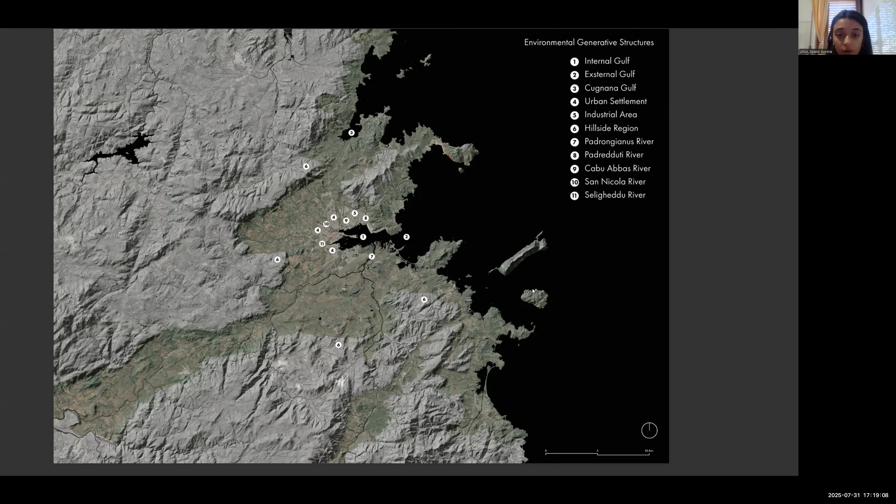We are the UNISS group for the summer school. We wanted to study Olbia by zooming out, to see the natural structure of Olbia and its environmental generative structures. So we tried to study the northern western part that forms a granite hilly heart surrounding the city, and the system of gulfs with the internal and external gulfs, to see how the form of the city of Olbia is based on the natural structure of this territory.

We focused our zone on the internal Gulf, which hosts the delta of the river Padrongiano. This zone comprises the delta of the river Padrongiano and also its fluvial park, which covers 33 hectares of green areas. They represent an important land for the city of Olbia, and it is located on the eastern coast, inserted into the Natura 2000 area.

This is the border of the Natura 2000 project, a network created by the European Union for the protection and conservation of habitats. It includes sites of community interest and special protection areas. It's also inserted inside the Contratto di Fiume, the river contract, which is a voluntary strategic planning tool for sustainable river and basin management.

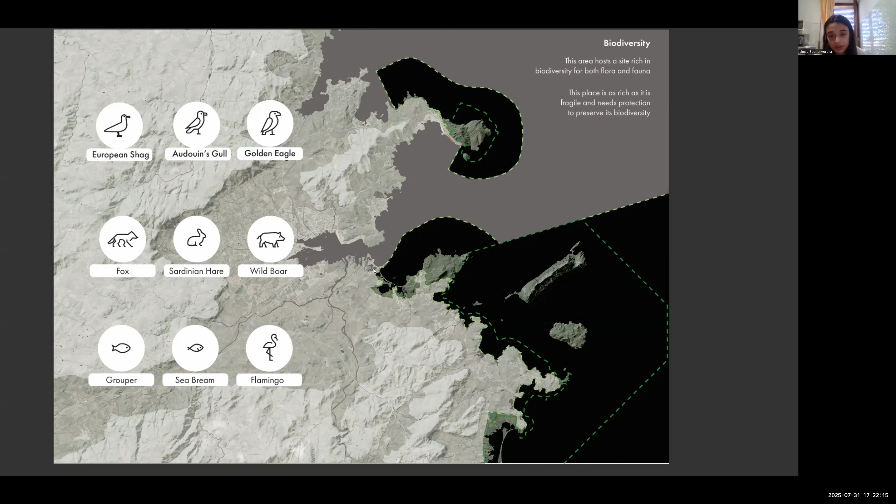It's a thing that in Sardinia is noted. This place is also fragile, especially due to the phenomenon of silting, caused by the connection between the internal and external Gulf. It is caused by the continuous accumulation of alluvial sediments, which lead to the formation of a sandy spit at the entrance of the Gulf, with the consequent risk of lagooning and also the loss of marine biodiversity.

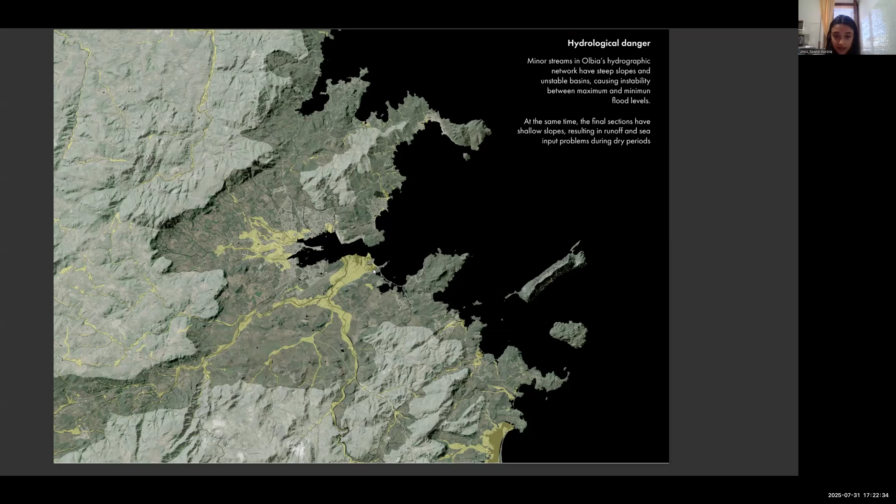The Delta River is highly exposed to hydrological danger. This is the danger and the risk: the hydrological danger represents the possibility of an event occurring at that point, while the risk represents an estimation of the damage an event could create in those areas. The hydrological risk and danger is due to the conformation of the basin and the torrential nature of the river, which is subject to flooding during intense weather events.

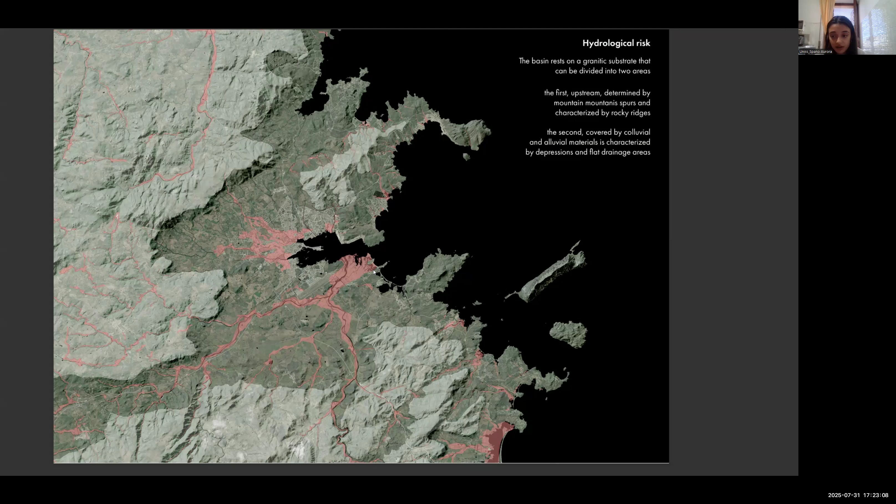We think it's important to remember what happened with Cyclone Cleopatra in November 2013 in Olbia, when the cyclone struck Olbia, causing severe flooding and landslides, and causing a lot of people to lose their houses and their activities. Also, the part of the delta of the river was mainly impacted, with the destruction of the Padrongianus Park, and in all of Olbia there were 13 deaths.

So to mitigate the risk of this event, this hydrological danger and risk, there are several risk mitigation projects that have been launched, such as the construction of a floodway for water drainage to reduce hazard in the urban, and the peri-urban part of the city.

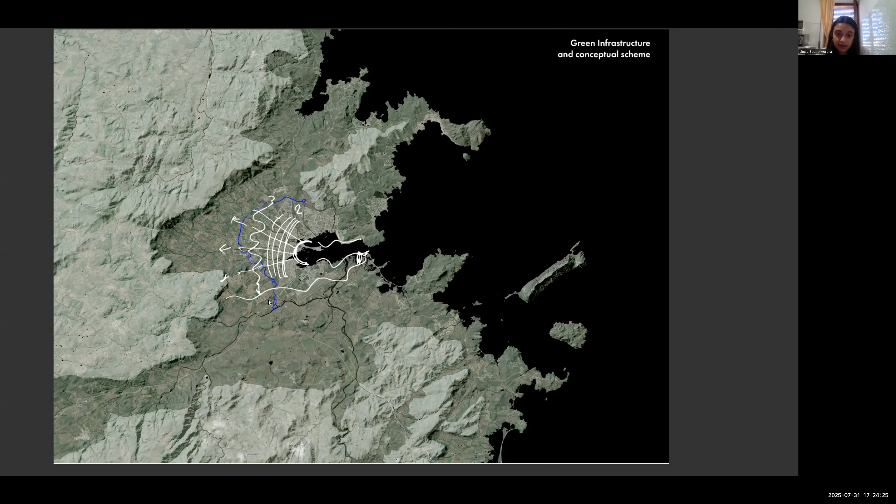The floodway functions mainly as a hydraulical diversion, allowing the flow of a river or stream to be reduced by diverting part of it. So this hydraulical infrastructure collects water from all the minor watercourses that are inside the city of Olbia, and directs it into the Padrongiano River and its delta. This is the point where the floodway connects with the Padrongiano River, but then it continues to direct the water into the delta.

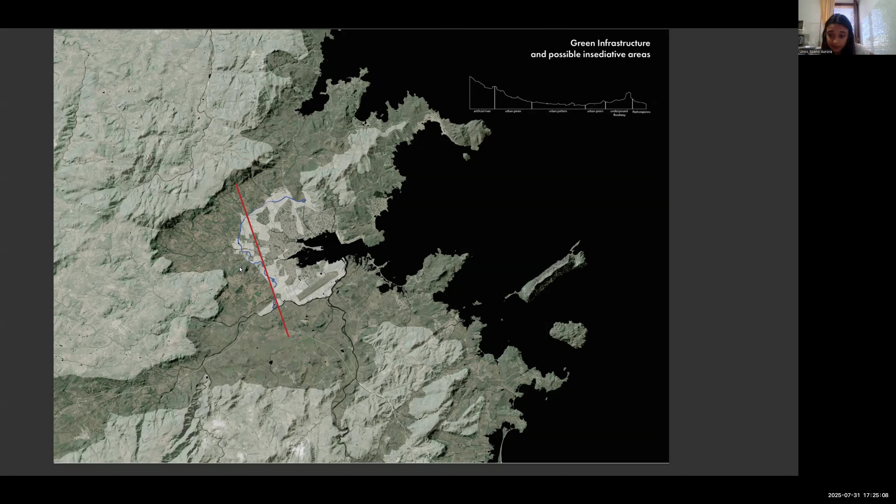The floodway is not just a hydraulical infrastructure, but claims to generate a different peri-urban city. Olbia, unfortunately, is undergoing a suburbanization event. The city is expanding following these main lines, leaving a lot of spaces overlooked, which we highlighted.

These spaces and the expanding of the suburb along this line are making the city less and less pedestrian friendly, and it's just not really viable at this moment.

So our green infrastructure is actually the floodway, but this infrastructure wants to define a border for the city, highlighting all those areas that are overlooked, in order to generate a radial reorganization of the city, especially of the suburbs, creating a sort of ring that will contain the problem of the expansion of the suburb, bringing new awareness and services to that part of Olbia.

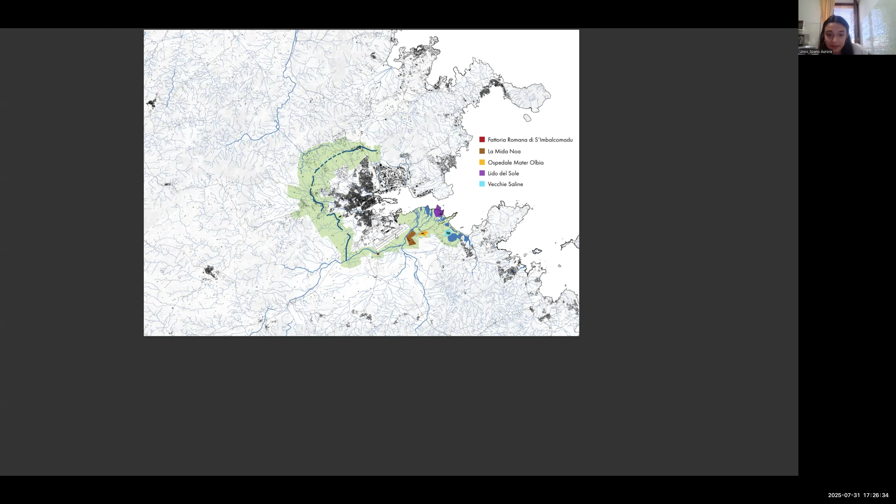Following the path of the green infrastructure that starts in the northern part and arrives in the delta, we encounter, especially in the southern part, in the third zone, a lot of urban elements that are prone to requalification, such as La Mida Noa, a new neighborhood that is expanding, or La Fattoria Romana di S'Imbalconadu, a ruin that is now abandoned but to be requalified.

Yeah, please finish your presentation. Okay, and you can proceed. I was scared. Okay, okay.

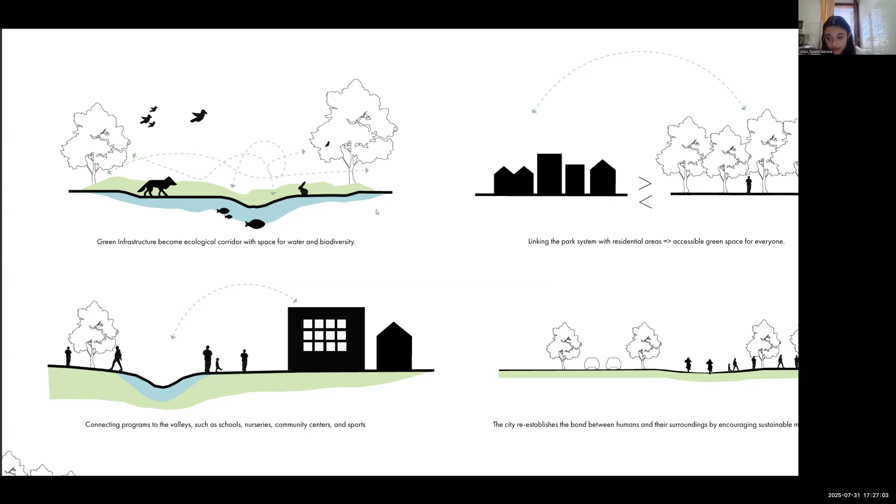So while this overlooked area of the suburb is kind of ignored, we wanted to insert the city into a new ecological corridor due to the green infrastructure. There is basically an artificial river, and we could cross the suburb. So this new river will create new spaces and services for the city, like schools or sports centers, daytime nurseries, and will encourage new sustainable mobility, such as pedestrian streets and cycle paths.

So we just wanted this green infrastructure to not simply be conceived as a defensive structure, but as a new element in the city that will cross and better all parts of the suburb of Olbia, creating, from the northernmost part to the Delta River, a new green city that is pedestrian friendly and more viable, including some requalification of the landscape and some architectural building for the Padrongiano River and park. So that's it, thank you for your attention.

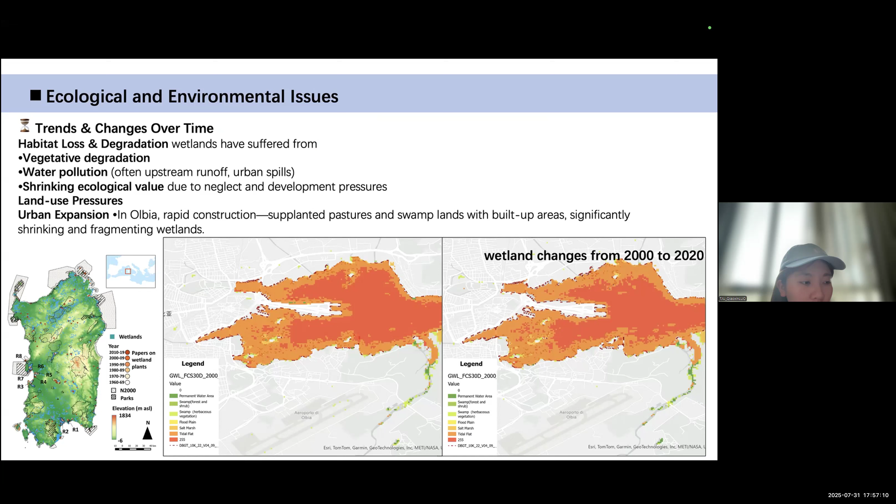Olbia's ecosystems are under threat. Coastal wetlands and river deltas, vital for flood control and biodiversity, suffer from vegetation loss, water pollution, and urban sprawl. Since 2000, unplanned construction has fragmented these habitats, risking ecological collapse.

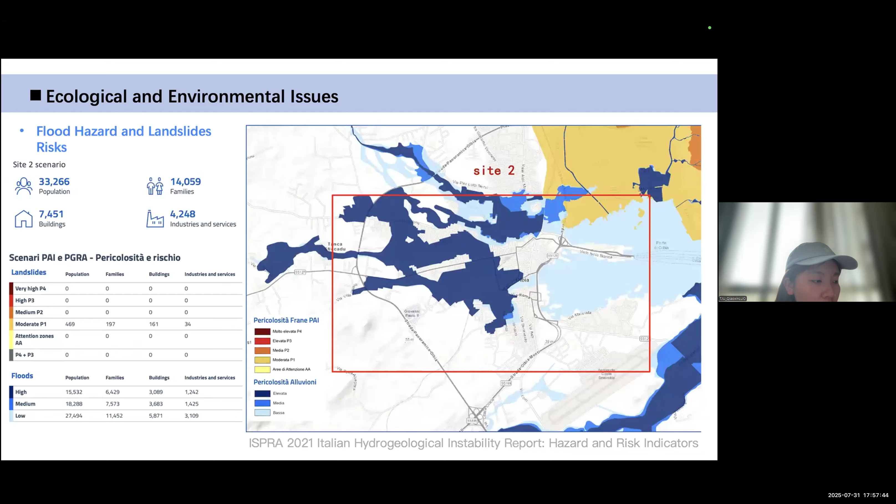Compounding environmental issues, Olbia faces high flood and landslide risks, as highlighted by Italy's 2021 hydrogeological instability report. These hazards disproportionately affect vulnerable communities and tourists alike.

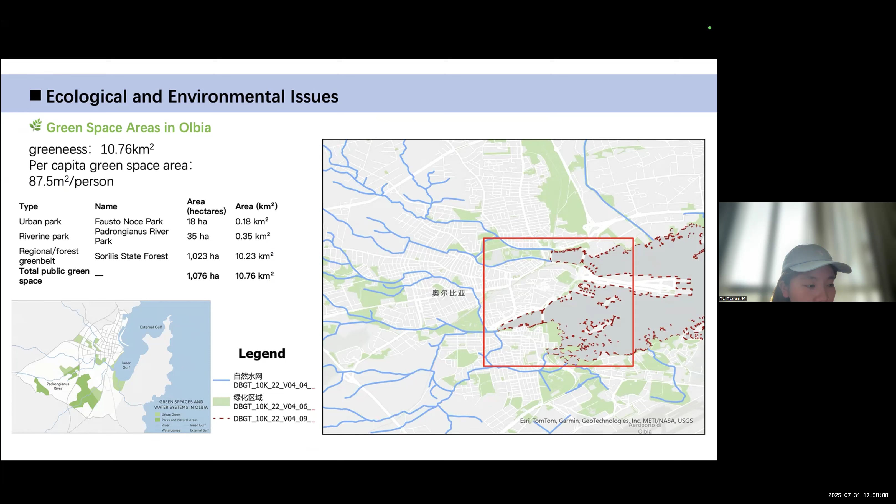Despite these challenges, Olbia has valuable green resources. The city offers about 10.76 square kilometers of public green spaces. These parks provide a strong foundation for our health-oriented design strategies, through which connectivity and accessibility can be improved.

However, public spaces lack integration with transportation. Pedestrian streets in the historical center fail to connect to bus hubs and the seaside, while coastal areas lack continuous walking or cycling paths, limiting accessibility and community interaction.

Also, public transit is inadequate. Only 10% of residents live within 500 meters of a bus stop, forcing reliance on private cars. This not only worsens traffic, but also excludes those without access to vehicles.

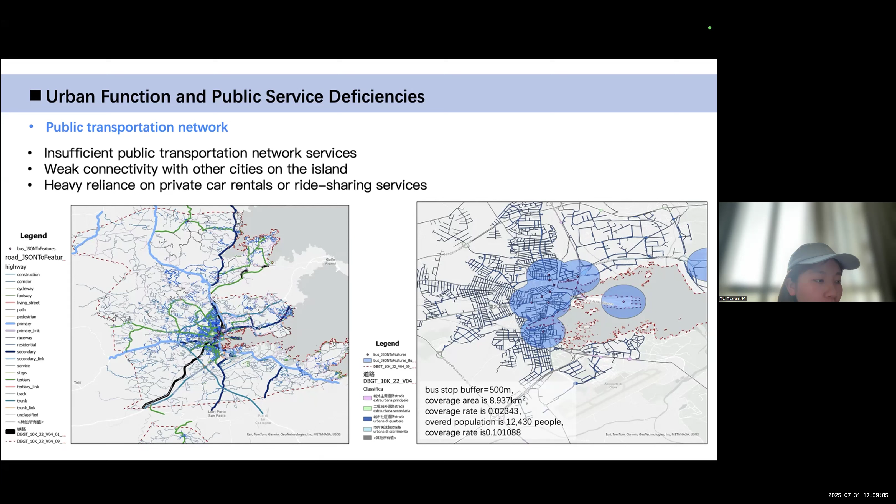The slow traffic network, critical for active lifestyles, is fragmented. Waterfront areas, prime for walking and cycling, remain underdeveloped, missing opportunities to promote healthy behaviors.

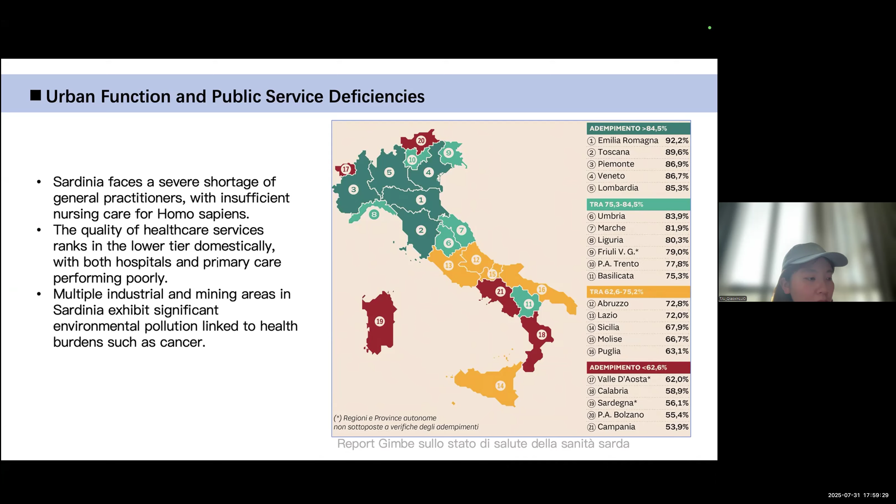Also, healthcare access is a pressing issue. The city faces a shortage of general practitioners, and Olbia's 3 hospitals struggle to serve 102,000 residents. Even with 3 hospitals, accessibility is uneven. While most residents are geographically covered, response times lag during tourist peaks, leaving both locals and visitors vulnerable.

So now let's focus on our core strategy: designing for healthier lifestyles. This framework integrates environmental, social, and physical health to create resilient and inclusive urban spaces. Our approach targets 3 pillars: reduce environmental hazards, promote active behaviors, and ensure equitable access to health resources.

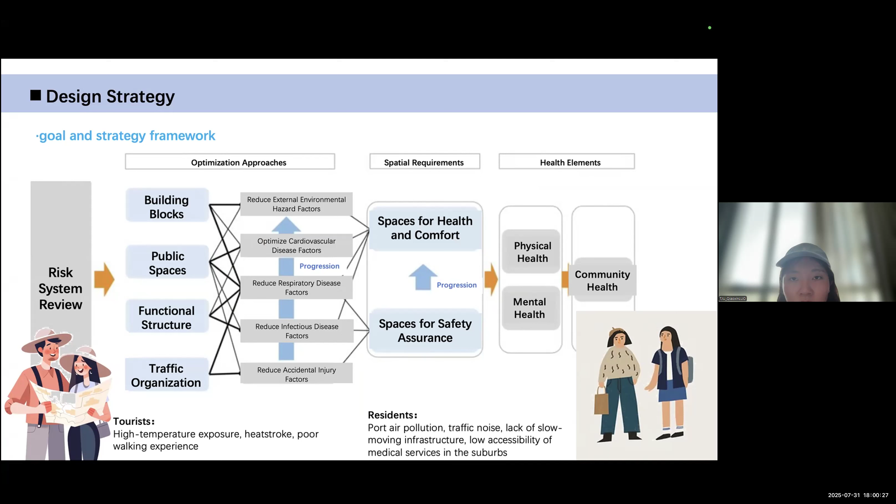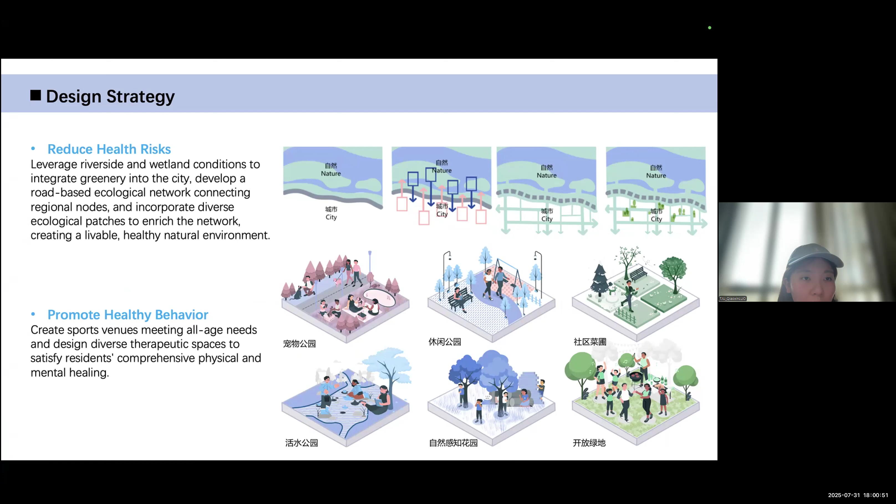We address risks to both residents, like port pollution, and tourists, such as heat stroke. Third, to ensure health resources, we propose a system of multi-level public services organized around walkable neighborhoods to improve access to daily needs and health care. These interventions will create a more sustainable and livable city.

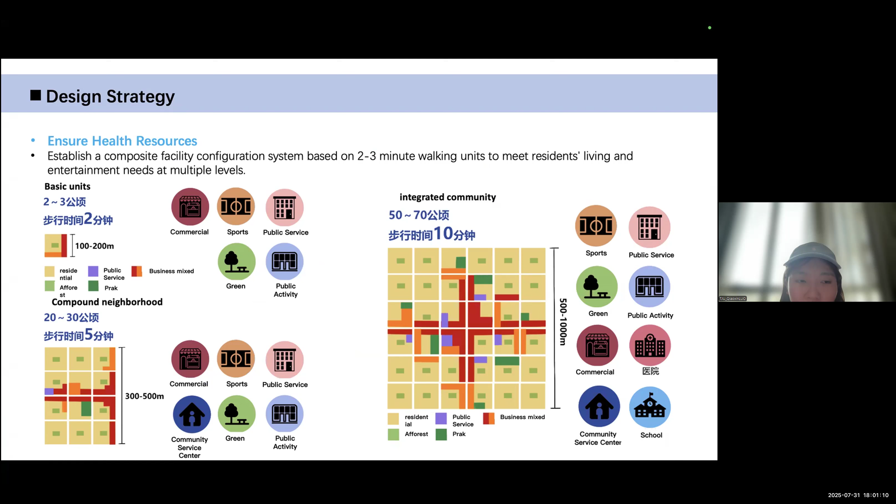Finally, we will construct a coastal green ecological network. This picture shows our strategies to improve health resource access. As we can see with walking times limited to 2, 5, and 10 minutes, residents can have great access to those health resources.

Finally, we will construct a coastal green ecological network, linking key nodes with a pleasant slow-moving system and optimizing transportation to boost regional connectivity. Sustainability remains central, ensuring harmony between urban development and nature.

To conclude, Aurora has the potential to become a model for healthy, sustainable cities. By integrating green infrastructure, inclusive mobility, and equitable services, we can create a place where both residents and visitors thrive. Thank you.

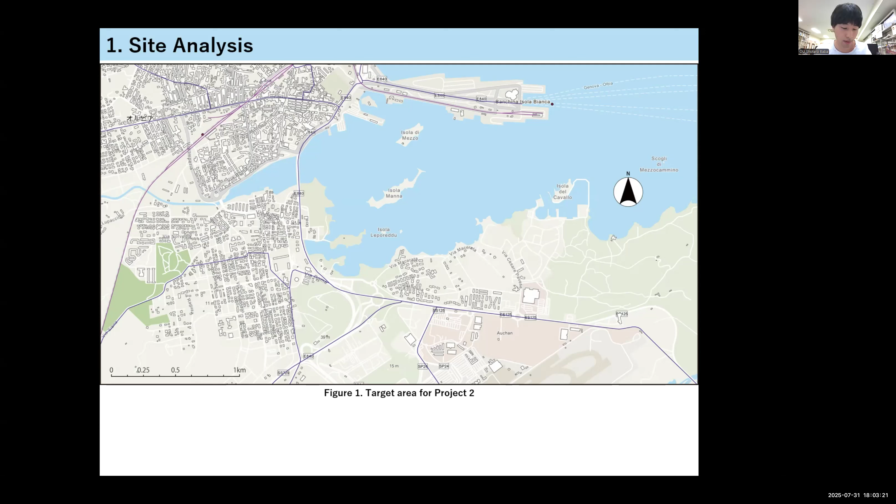Hello, we are students at Oita University. We will be presenting on Project 2.

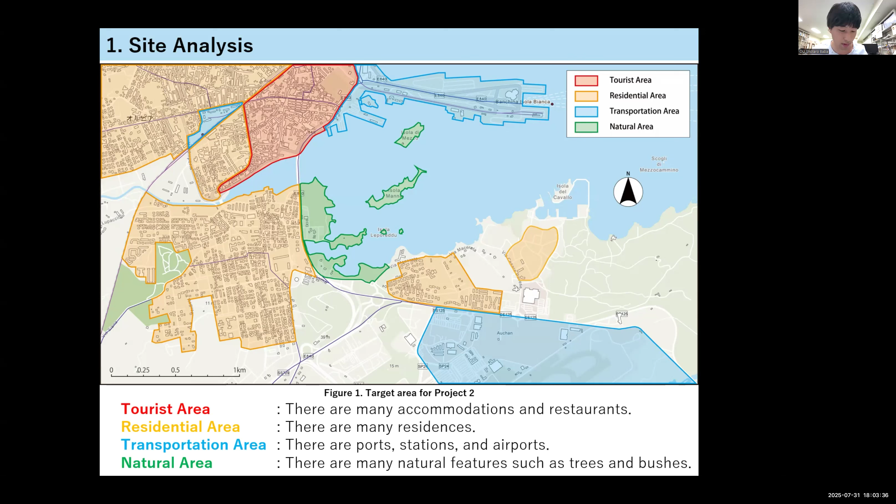The first is the site analysis. Figure 1 shows the target area for Project 2. The target area was divided into 4 areas based on the characteristics of each area.

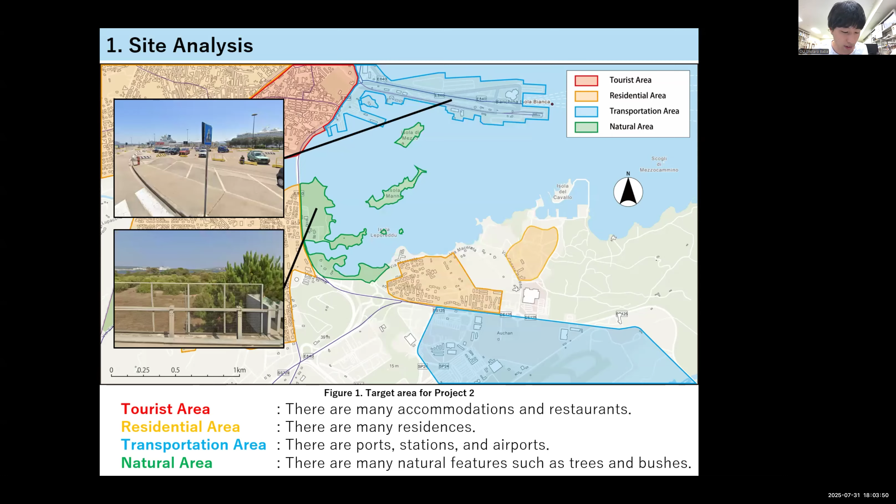We consider the red area to be the main tourist area, the orange area to be the residential area, the blue area to be the transportation area, and the green area to be the natural area.

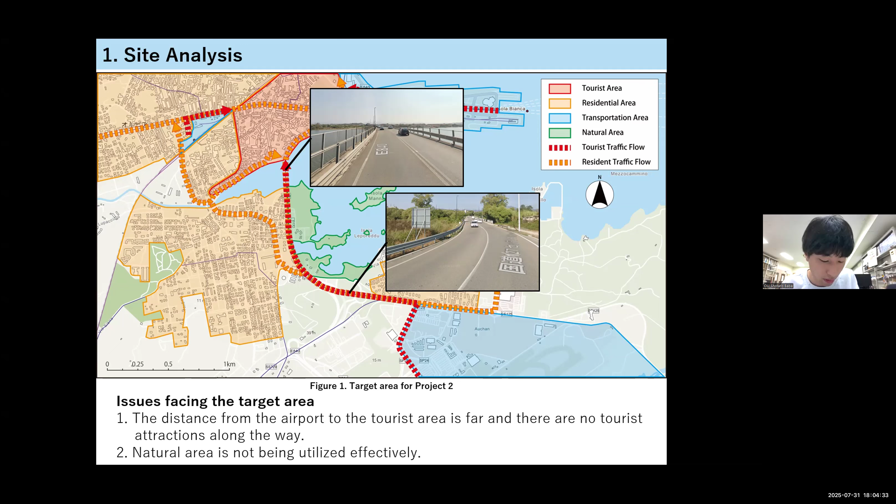The red arrows in the figure indicate tourist traffic flow, while the orange arrows indicate resident traffic flow. There are many roads that are difficult for tourists to walk on, so it is expected that people will often use cars to move between each area.

Based on these findings, we consider four issues facing the target area.

The first is that the distance from the airport to the tourist area is far, and there are no tourist attractions along the way. The second is that the natural area is not being utilized effectively.

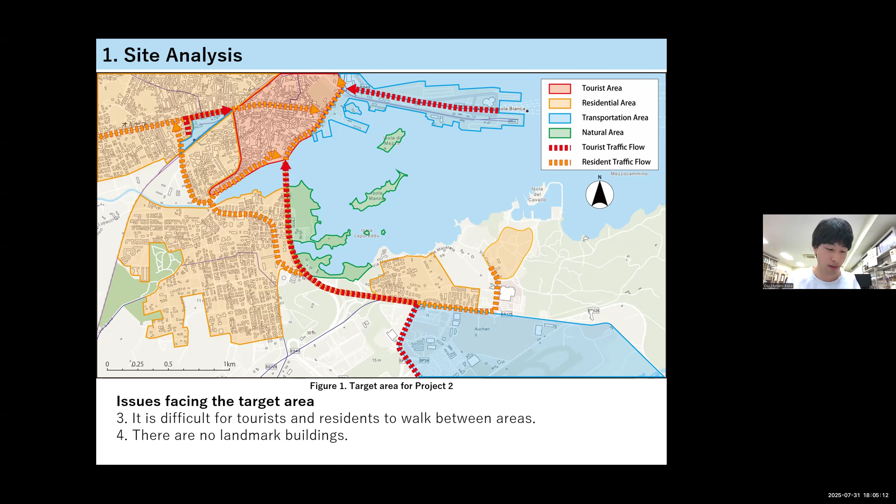The third is that it is difficult for tourists and residents to walk between areas. The last is that there are no landmark buildings.

Based on these considerations, we offer the following suggestions. The title is En. En has two meanings in Japanese.

One is circle. The other is an encounter or relationship between people.

In the building we propose, people will choose what they want to do and will not interfere with each other's choices.

People accept each other's actions, and new connections are formed in the town surrounding the bay.

These are the diagrams of our proposal. The first is the crossing of gazes in different spaces intersected by the change in height.

The second is interaction. New spaces are created by the interaction between tourist and resident.

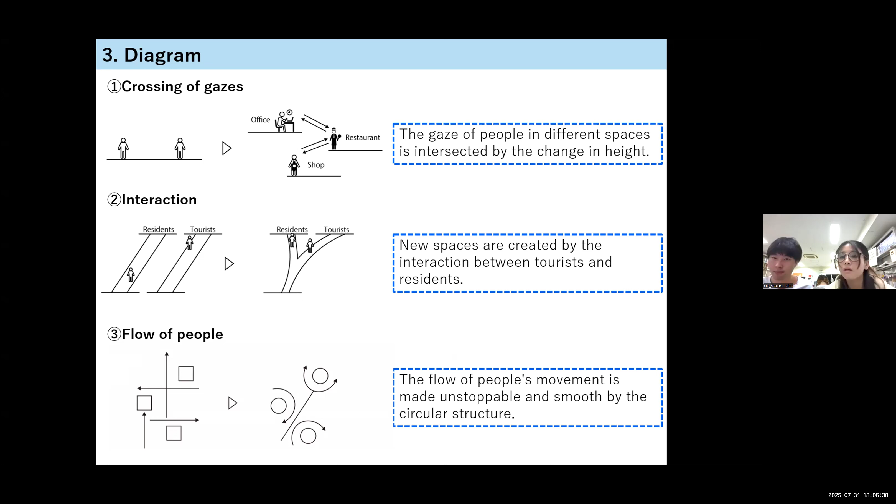The last is the flow of people. The flow of people's movement is made unstoppable and smooth by the circular structures.

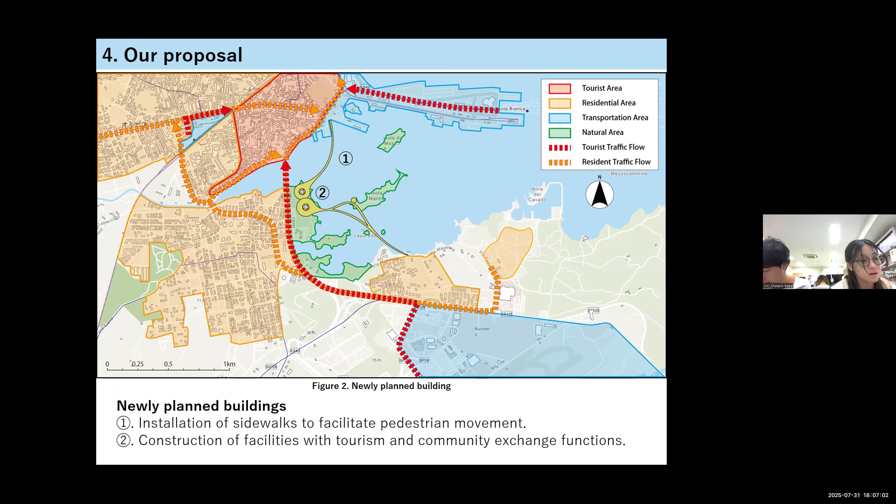The second is the construction of facilities with tourism and community exchange function.

The effect of the newly planned buildings are as follows. Placed...

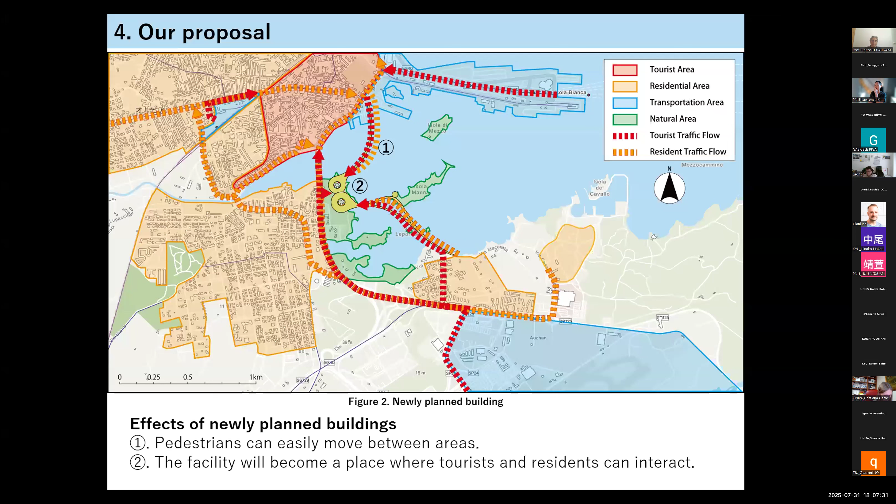In areas by installation of sidewalks, the facility will become a place where tourists and residents can interact.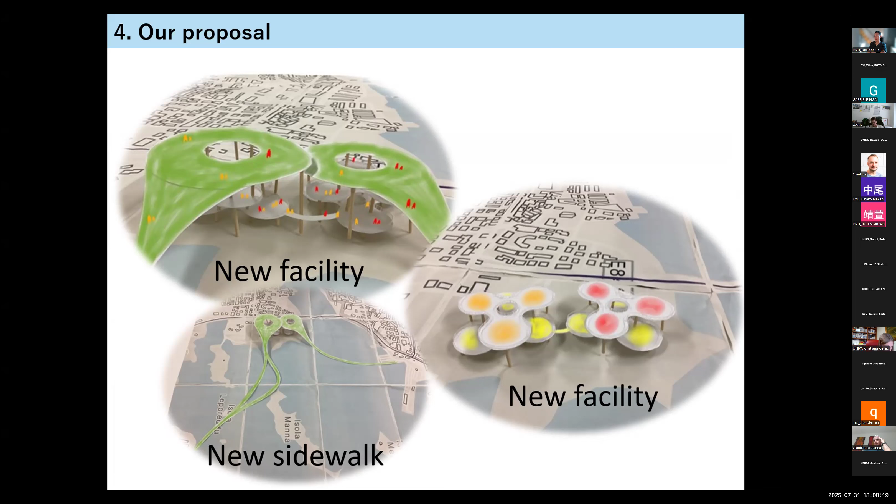Here shows an image of our buildings. As shown in this building's model, each space is at a different height.

Tourists and residents can interact on the lowest floor. In addition, the lowest floor is floated above ground level, so that it will not lose function even when flooded.

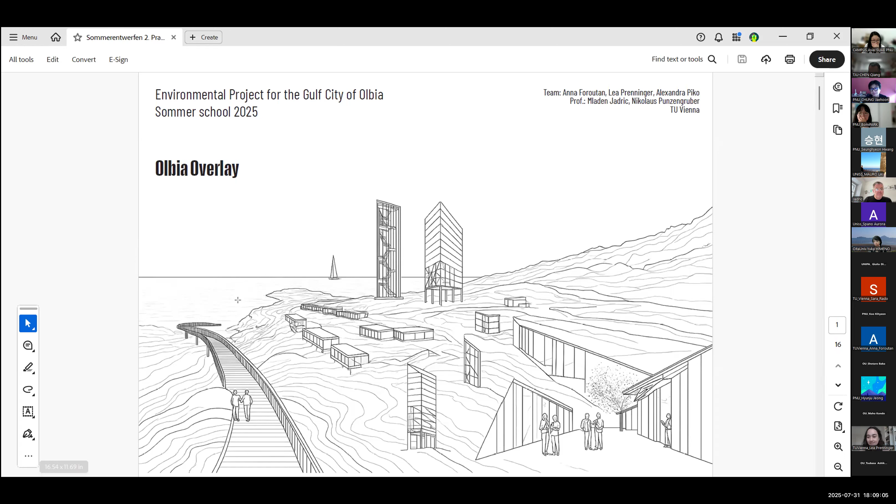Hello again from Vienna. Today we want to present to you our further developments on our concept, Olbia Overlay. Last week, or on Monday, we already presented to you all the urban, cultural, and environmental challenges Olbia is facing.

But we also mentioned its lush nature and the potential that arises through working with these problems.

To summarize, our goal is to enhance the mobility and accessibility of the area and to create a platform for educational and cultural events, but at the same time to preserve Olbia's nature and also the historical sites.

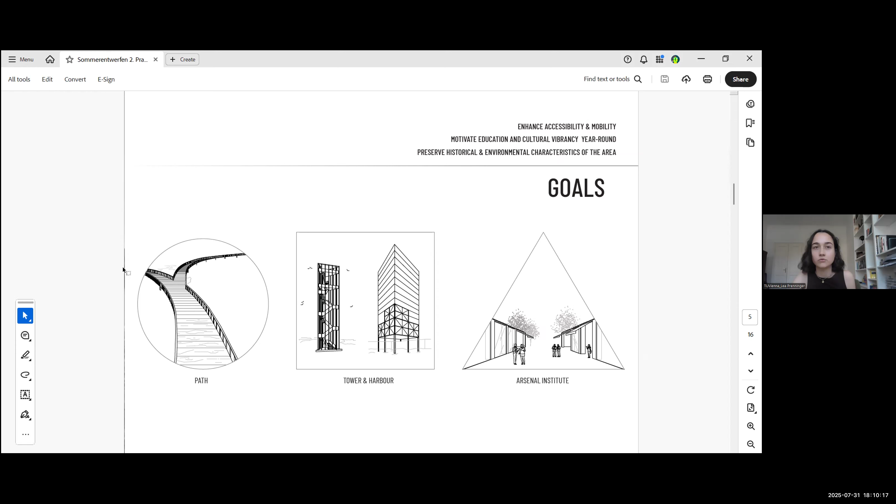Our main interventions are a pathway and a tower overlooking Olbia's nature, and furthermore an inviting harbor region, as well as an institute located in the old arsenal, which is accompanied by a park along the Padrongiano River.

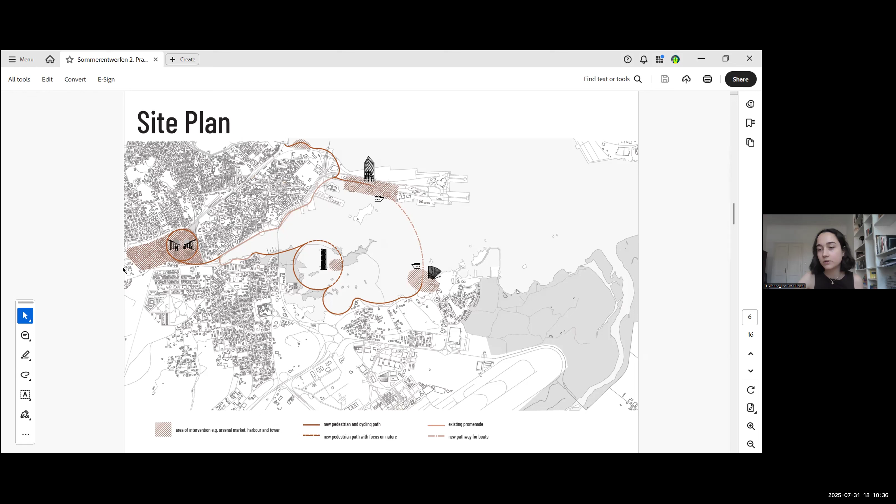Those main interventions are all connected by a pathway, which is now enclosed by a boat route, and which also enables not only mobile people to use our path, but also, for example, elderly people to experience Olbia's nature.

And also the coastline. Regarding the dimensions of our pathway, the total length is about 7 kilometers.

This means it would take about 2 hours when walking really slow, or about 15 minutes by bike. So this is a major improvement, especially for a fast and at the same time safe route along Olbia's coast.

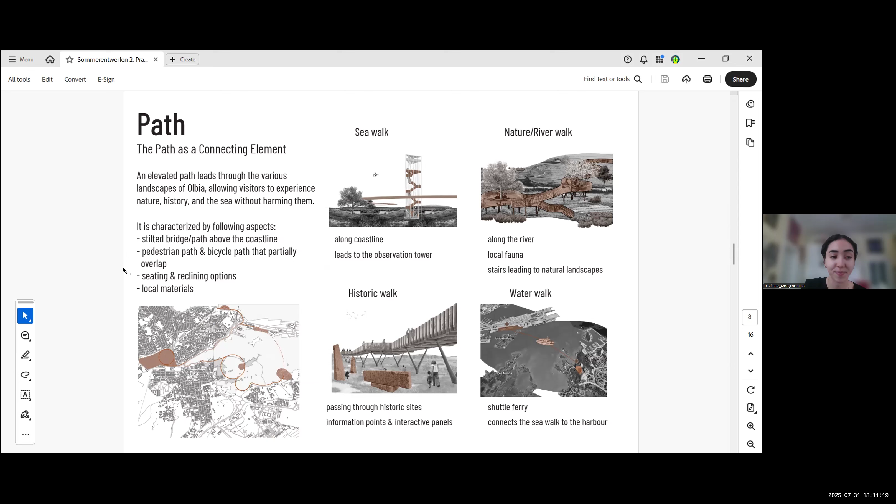In addition to the sea walk, river, and historic walk, we have added a new boat path that adds a fluid connection across the water. This shuttle connection links the amphitheater area directly with the harbor, creating a seamless movement between land and sea.

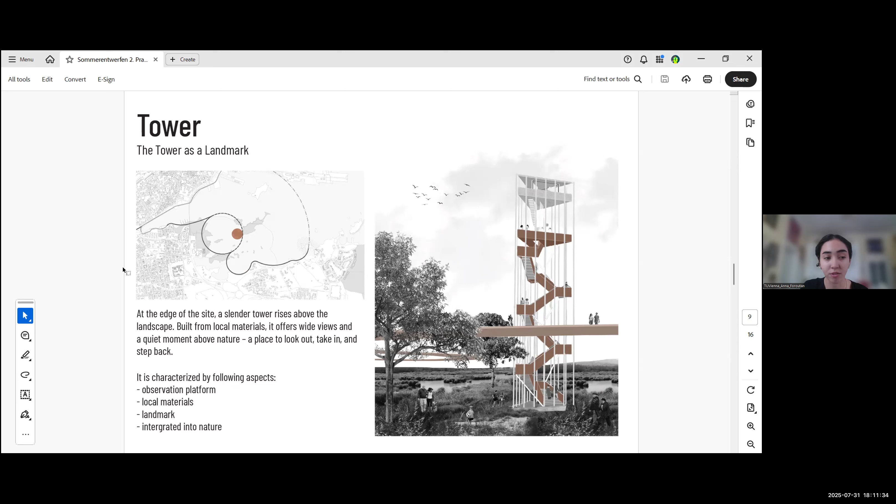An observation tower becomes a visible point for orientation. It's slender, elevated, and built from local materials. It's open, and the design ensures that it does not act as a barrier for birds or animals, but rather coexists within the landscape.

The former arsenal is being repurposed and expanded into a contemporary institute for education and research. This transformation is complemented by surrounding residential and student housing, creating a dynamic, lived-in academic environment.

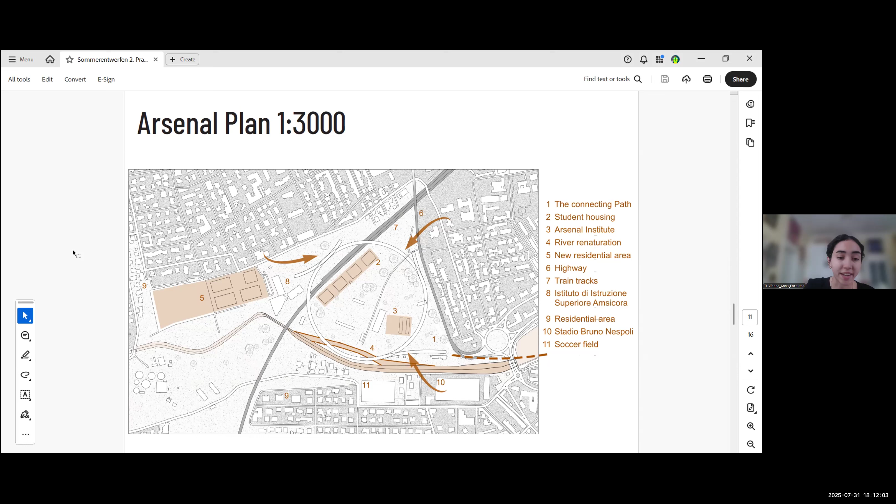The adjacent river is renaturalized and split into two arms, forming an island that becomes a new focal point for ecology and recreation.

A public park with an arboretum enriches the space further, offering a living classroom and quiet retreat for students and locals alike.

Located directly at the ferry terminal in Olbia, the port houses serve as the first point of contact for arriving visitors. The buildings combine key functions such as a hotel, maritime center, tourist information, rooftop cafe, and restaurant. With their mixed-use program and strong connection to the waterfront, they offer orientation services in a welcoming atmosphere. Key features include a viewing deck, integration with the shoreline, and multifunctional use.

Gallura granite, a coarse-grained and weather-resistant stone traditionally used in Olbia, serves as the base material for the landmark tower, grounding it both structurally and contextually. Above, the structure transitions into lighter materials, primarily wood, chosen for their durability and strong local identity.

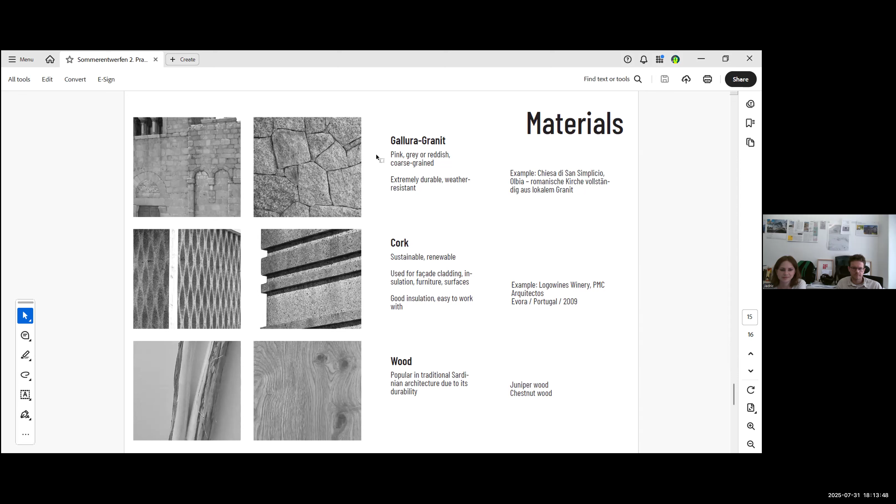Yeah. Thank you. Thank you, Tobin.

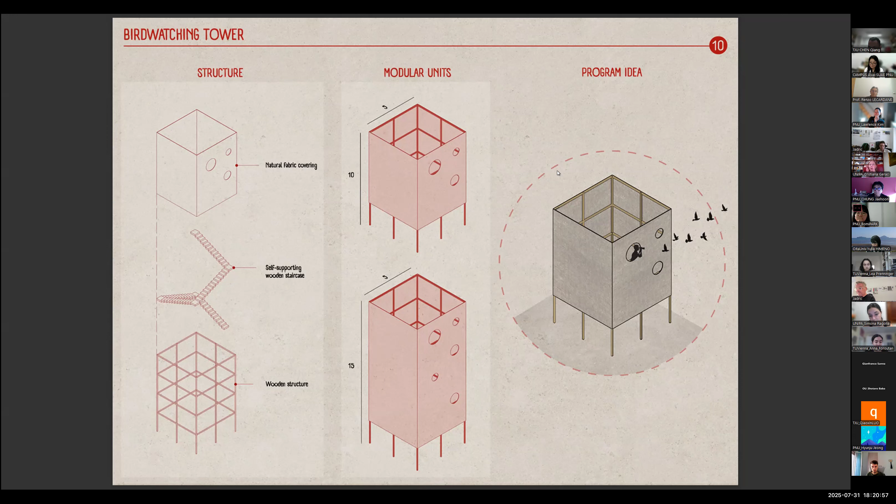Our design proposal is articulated through three main interventions conceived to integrate into the environmental context and generate a new relationship between the natural, human, and animal elements. For the first, we have the bird watching tower, designed as a flexible module adapted to various geographic and visual conditions, made of natural wood and steel, providing shelter and observation space for both people and wildlife.

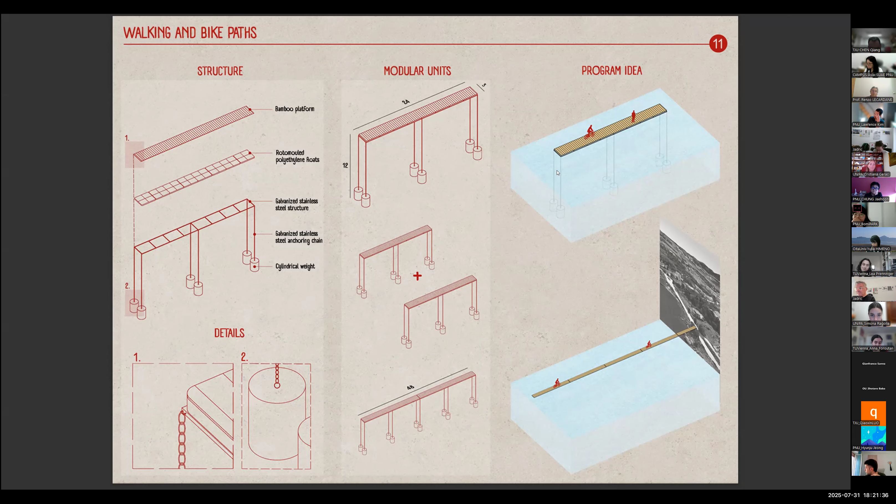Some versions include interactive micro-habitats to support bird biodiversity. For the second, we have the walking and bike paths, light, reversible, and resilient infrastructures. The supporting structure is made of stainless steel with a bamboo tread walking surface, a modular float anchored safely with cylindrical weights adaptable to the city morphology. These paths are designed to immerse into the landscape following the waterline without interrupting it.

For the third, we have the floating dock, designed to ease pressure on the central port by offering a new docking area for small tourist or cultural vessels. Here modularity is key. Each dock can be disassembled, adjusted, or relocated, and the goal is not to build forever, but to inhabit temporarily with ecological intelligence. At that end, we summarize our work in a conceptual map of action.

Okay, can I finish? And we...

We decided on three points: inclusion and equity, promoting access to the place, the resources, and the opportunities for all; coastal resilience, strengthening the territory's ability to respond to extreme events; ecosystem reinforcement, protecting and restoring biodiversity, creating favorable habitats. And we also estimated the potential employment impact of our proposal.

The floating dock, for example, needs a mooring assistant, a surveillance role, docking management. This employment grows not as an end in itself, but as a virtuous outcome of a project rooted in the care of the territory, synergy with nature, and respect for all forms of life.

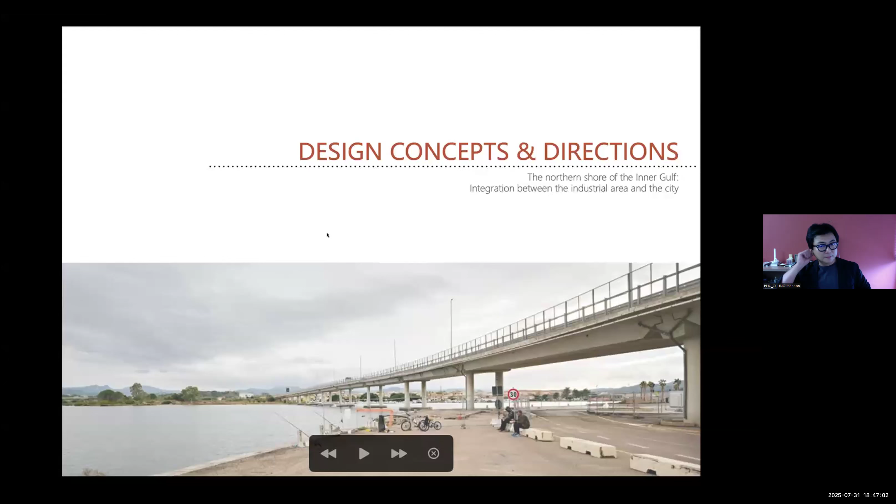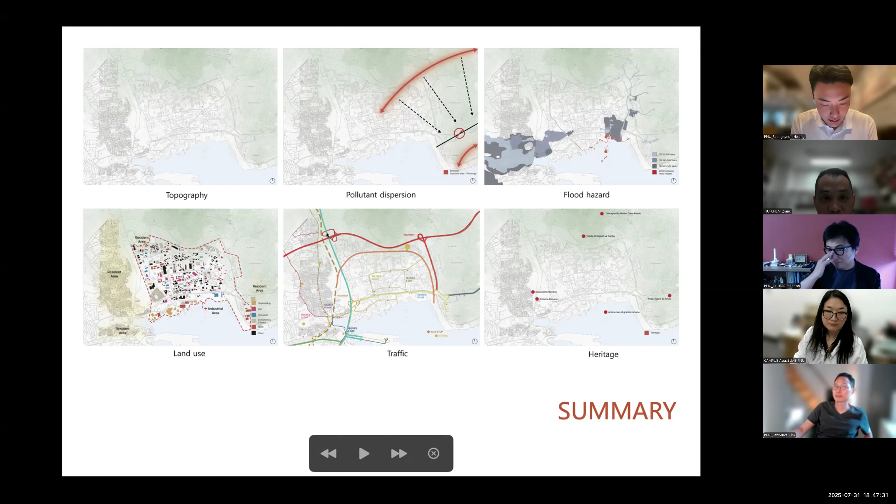Hello, we are Changwon Yu, Hyunju, and Seunggu Hwang from Pusan National University. Today, we would like to present how we plan to develop Project 1 based on our previous research. To begin with a summary of our previous presentation, through topographic and climatic analysis, we identified 4 key issues.

First, the potential spread of pollutants by northwesterly winds. Second, generally low flood risk, but certain areas lacking sufficient drainage. Third, a disorganized layout of industrial facilities. And fourth, traffic congestion and urban disconnection at key intersections. Among these, we focused on the waterway that traverses the city.

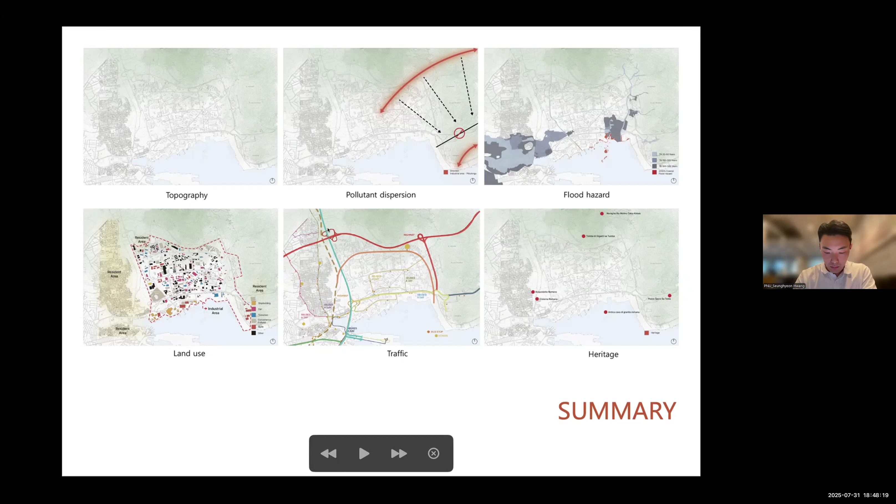We proposed that this water channel is not merely a drainage facility, but a potential urban public spine that connects industry, housing, and green spaces. Much like Cheonggyecheon in Seoul, it could become a corridor for people, memory, nature, and industry, revitalizing the district with a new identity.

We believe it starts with reimagining the area not as a factory complex, but as a flexible and hybrid boundary space. Even the operating industrial facilities should be integrated into the city's landscape, coexisting with citizens, travelers, nature, factories, and memory. Thus, we propose a project titled Olbia Softscape, where industrial space, housing, nature, people, and memory are not rigidly compartmentalized.

Rather, they are gently connected. Our concept envisions a soft, blurred landscape where boundaries dissolve around the city's waterway. The core concept is blurring. Previously, urban zones were clearly divided: industry, housing, and tourism, with barriers such as railways and roads, or due to lacking infrastructure. Our idea of blurring boundaries seeks to remove this strict separation and introduce new buffer zones that overlap the edges, narrowing the gap and creating seamless transitions.

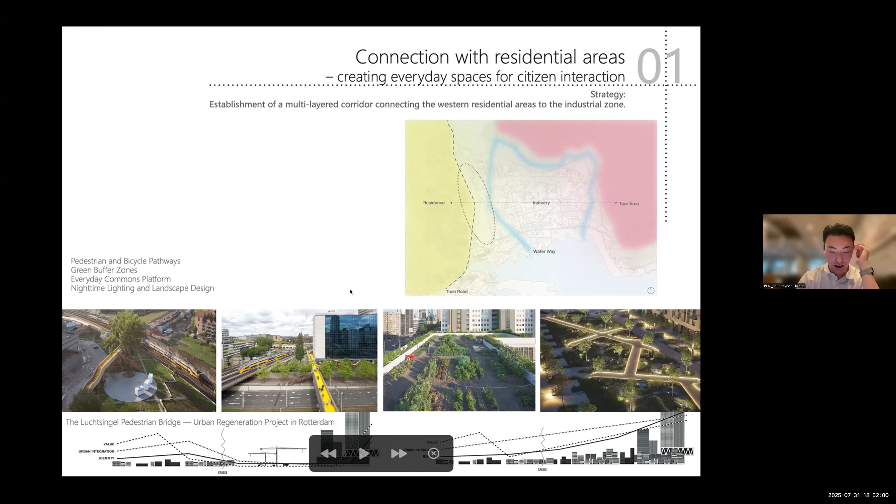Next, connecting with the residential area, we believe that everyday public spaces for citizens are crucial. We propose building a multi-layered connection corridor from Western housing to the industrial zone. This should include pedestrian and bicycle paths, common platforms, and shared spaces that foster daily interaction between residential and industrial areas. This is not only a design improvement, but a needed response for local revitalization.

For cultural heritage, we want to explore coexistence between memory and industry. We propose linking industrial buildings, heritage sites, and waterways as a collective memory route. This includes a historical walk along the waterway that guides tourists through the heritage area and factories, while also transforming factory facades into digital archives that record community memories. For instance, interviews such as My Father's Shipyard Stories turn memories and labor into living references for heritage knowledge and the economy.

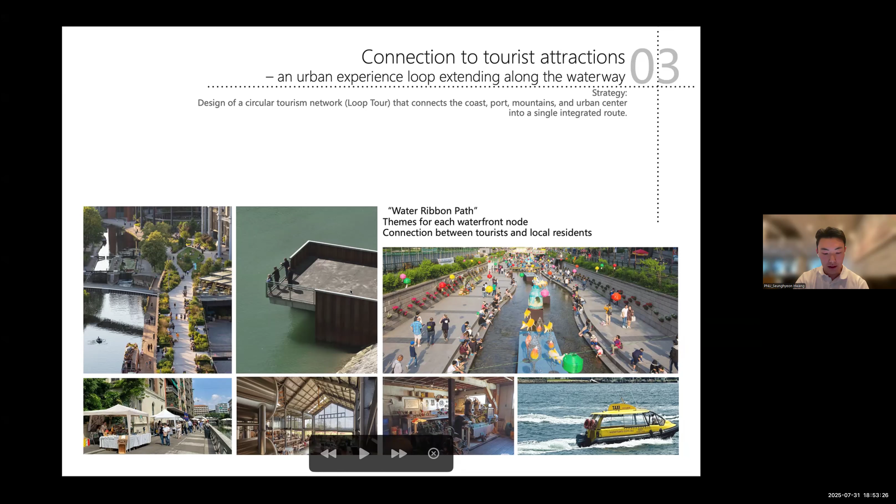Now, connecting with tourism, we believe it is essential to design an experiential urban journey all along the waterway. We propose a circular tourism network connecting the coast, hills, and city center through a water ribbon path. A trail of walkways and cycling paths would extend from Pittulongu Beach to the city square with themes that reach tourists and residents, allowing visitors not just to pass through factory zones, but to experience a landscape where local life and industry are integrated.

Our concluding message: first, Olbia is a city of blurred boundaries. Here, industry, nature, people, and memory do not clash, they coexist in continuity. Second, Olbia's future lies not in division, but in intersection. The flow from industry to housing, green space, and tourism creates a new urban culture along the water.

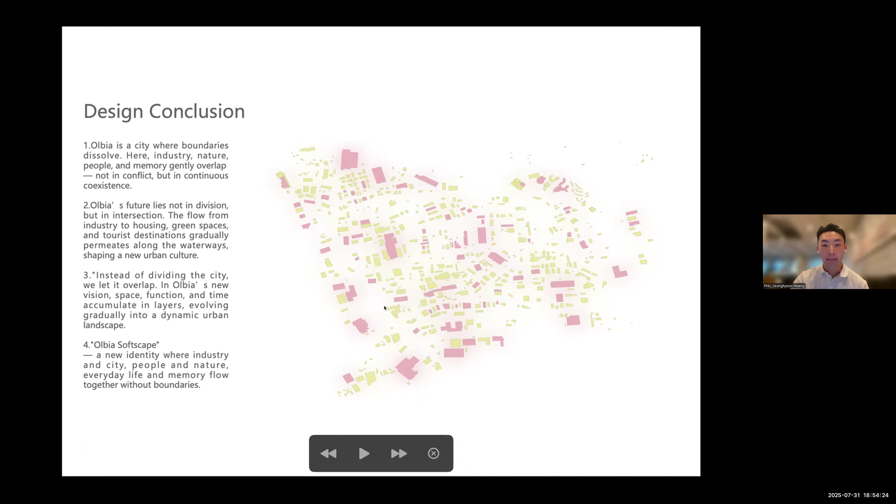Third, we don't divide the city, we layer it. Functions, spaces, and time stack and transition, forming a gradually transforming urban identity. Last, Olbia Softscape is the city's new identity, where industry, nature, people, memory, and everyday life gently permeate one another without boundaries. Thank you for listening.

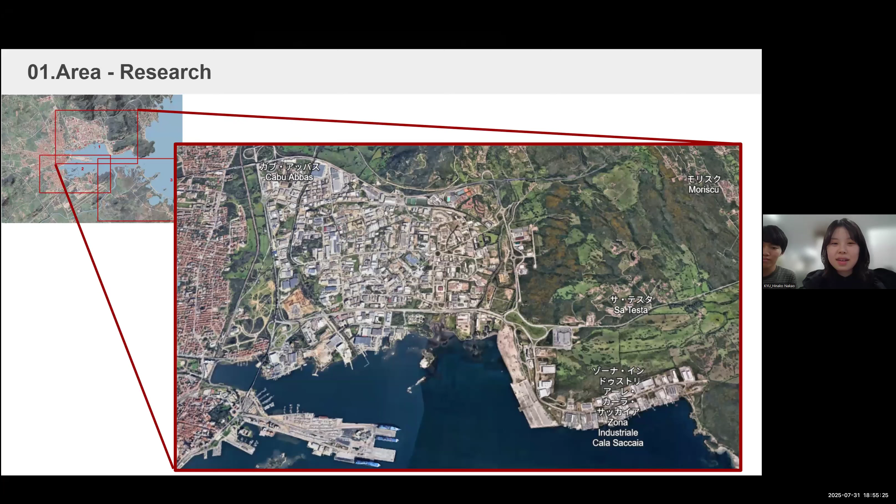Hello, we are Yorito, Takumi Saito, and Hinako Nakao from Kyushu University. We are going to present site analysis and design concept of area 1.

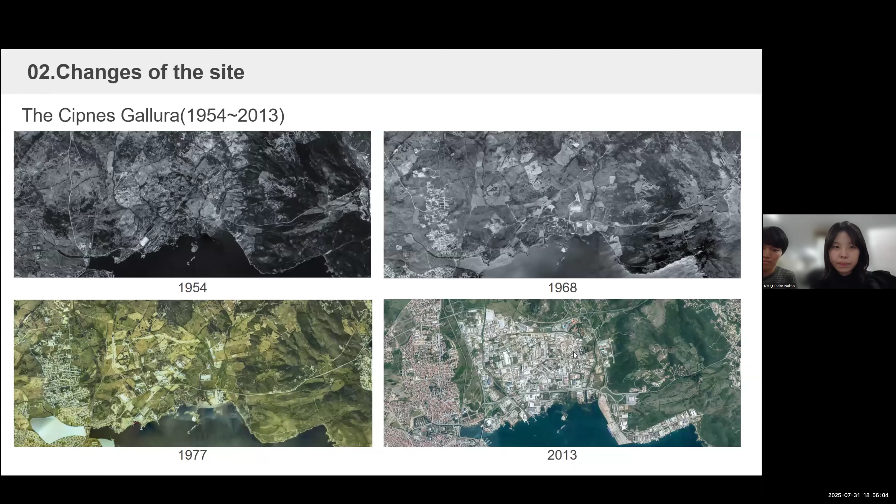This is site 1, and this is the change of the site. In 1954, it was almost all nature, but gradually developed. In 1977, the residential area and the nature area were still connected. But in 2013, the industrial area became so dense that the residential area and the nature area became divided.

Currently, the zoning of the northern shore of Inner Gulf is urban, industrial, and nature. There are some heritage sites along the north shore of Inner Gulf, and in the nature part, there are some attractive features for tourists and for the people of Olbia.

This is a hiking trail. We can see the ocean, green spaces, and heritage sites around this hiking trail. We think this is a strong point in this site.

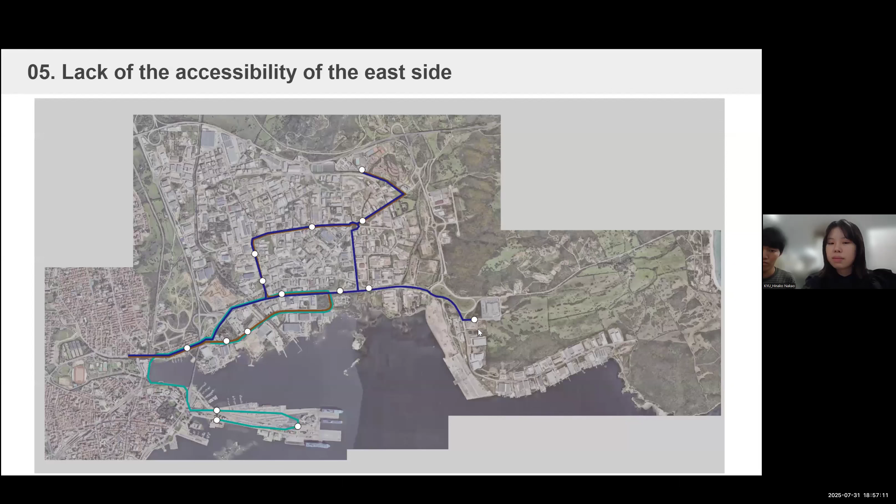However, we cannot access this area with public transportation. This is the bus route of the industrial area, and the bus route ends here, so it's not connected.

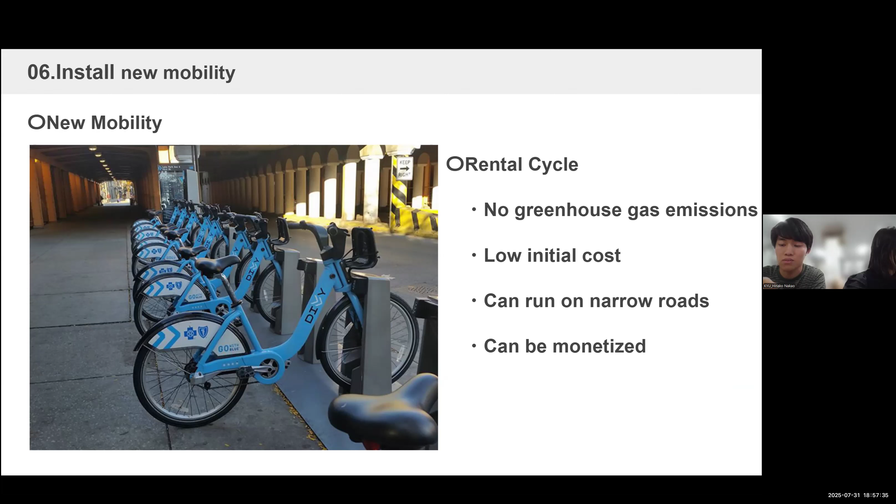We propose introduction of a new form of mobility: rental bicycles. Rental bicycles offer several advantages. For example, they do not emit greenhouse gases, have low initial costs, can navigate narrow roads, and offer potential for revenue generation.

With this new mobility, we propose the roadmap. First, tourists arriving at the port will go to the rental bicycle station, where they can leave their luggage and rent a bicycle. They will follow the coastline and enter the industrial area, where we plan to establish a tourist information center and a cafe near the entrance. After that, continuing along the coast, they can enjoy restaurants, parks, cafes, and some activities as they cycle toward the hotel, which is number 5.

They will also be able to visit the heritage area east of the hotel. Next, we will talk about the architectural design of each facility. Along the coastline of the industrial area, there are many old factories and vacant lots. We plan to utilize these spaces in our architectural proposal.

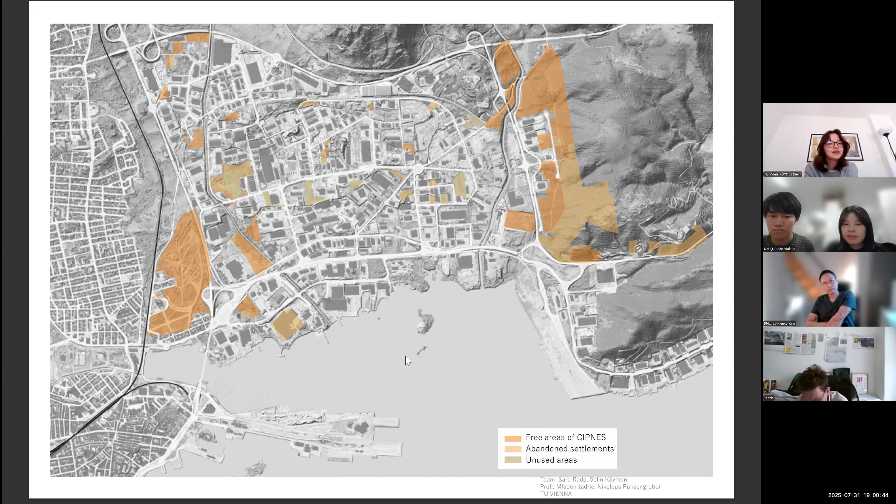One of our main goals was to build a connection between local products and the many visitors of Olbia. We envision creating spaces where local production, cultural exchange, and innovation come together. Those formerly abandoned areas will be transformed into open market halls that host a vibrant mix of local crafts, food specialties, and maker spaces.

Now, more in depth about how we plan on doing this.

In general, the use of local and reclaimed materials is of great importance to us because we think it plays a vital role in taking meaningful steps towards a more sustainable future. Given the location by the sea, it was immediately clear that we wanted to incorporate locally sourced maritime materials.

Along the coast of Olbia, you find oyster and cockle shells, and they're readily available and represent a natural and very valuable resource for us. The specific production process varies on the intended application. As I mentioned before, the shells can be used as an ingredient for wall plaster, but also offer great versatility for other ranges of uses.

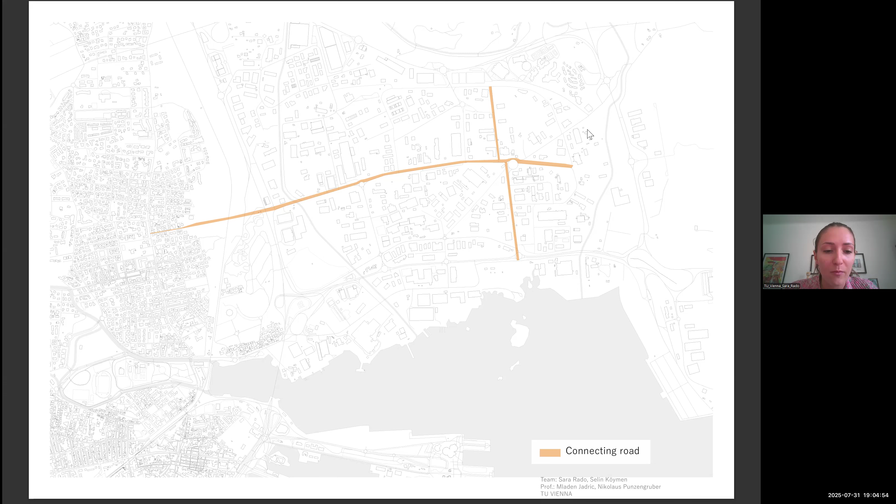The entire horizontal road spans approximately 3 kilometers, making it ideal for bicycle mobility and active transportation. Equally important was forging a strong link between the university and the sea, the vertical road, enabling a flow between research, education, and production—three elements we see as vital for Olbia's future.

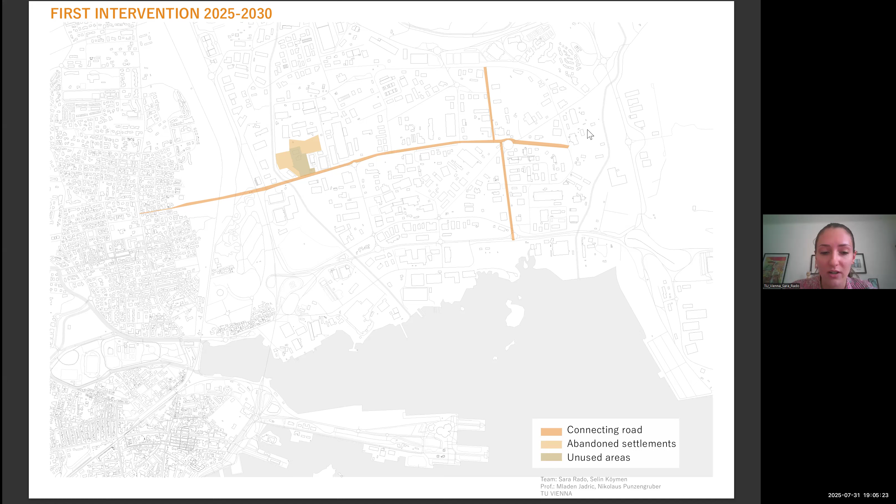We approach this vision as a phased transformation over time, starting with a series of small strategic interventions. The first of these is located 1 kilometer from the city and takes the form of a multifunctional building. This early intervention aims to reinforce the connection to the urban core.

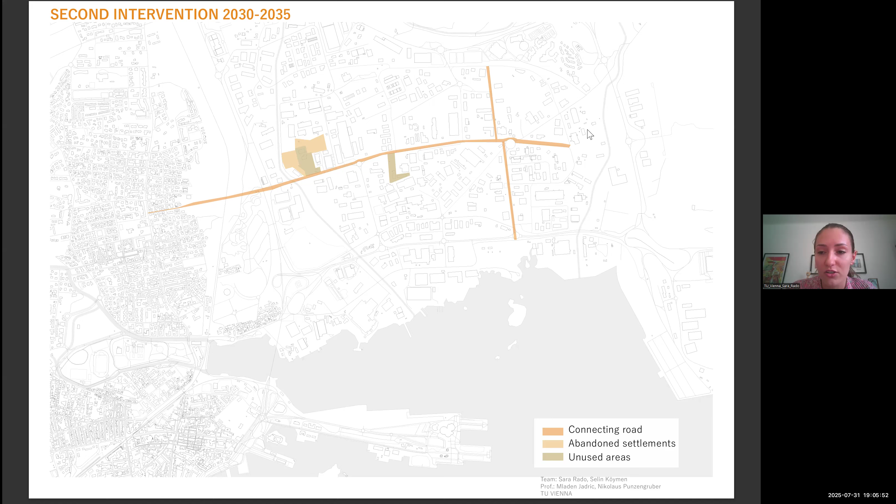This building will be converted into an open market hall hosting a dynamic mix of local crafts and fruit products. The second intervention focused on revitalizing one of the former industrial buildings, transforming it into a vibrant public space with maker spaces, an open gallery, and areas for workshops and community engagement. Open to everyone, this space invites collaboration between locals, students, artists, and visitors, encouraging creative production and cultural exchange.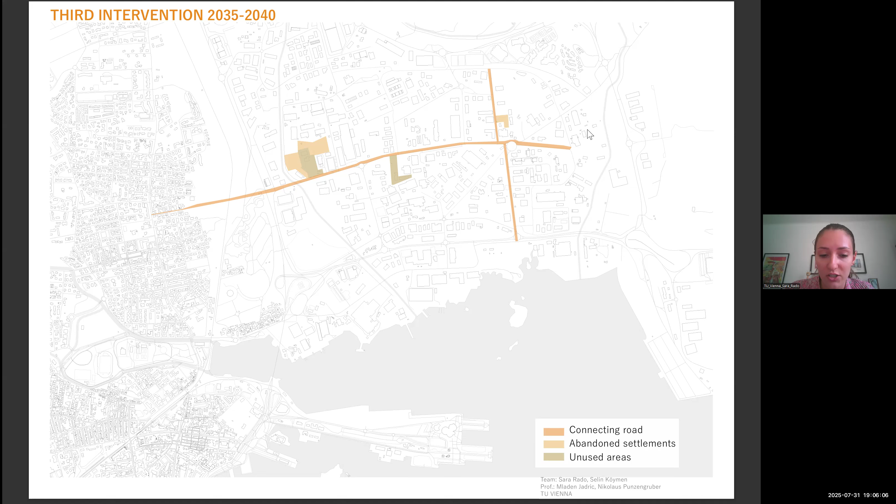The third intervention introduced marine research facilities with production halls. This creates a direct link between education and science, allowing the university to work alongside production industries in a shared ecosystem.

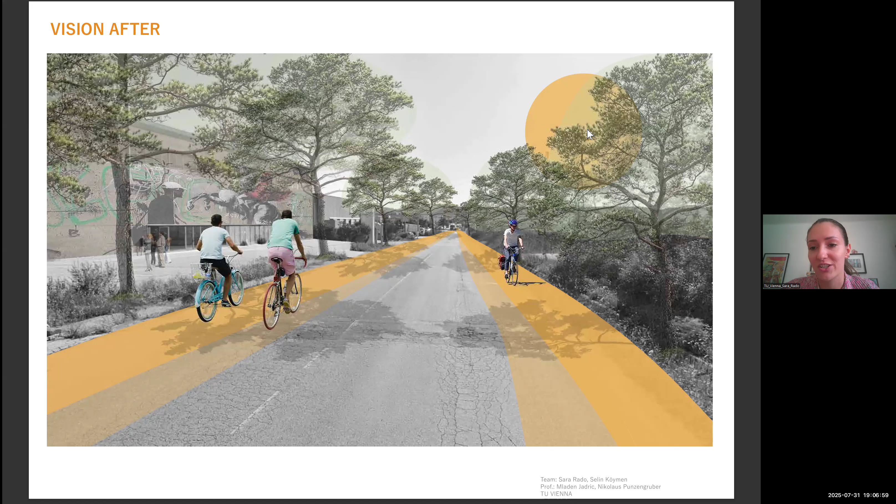Together, these interventions mark the beginning of a larger transformation, connecting city and sea, knowledge and production, past and future. Thank you so much for your attention.

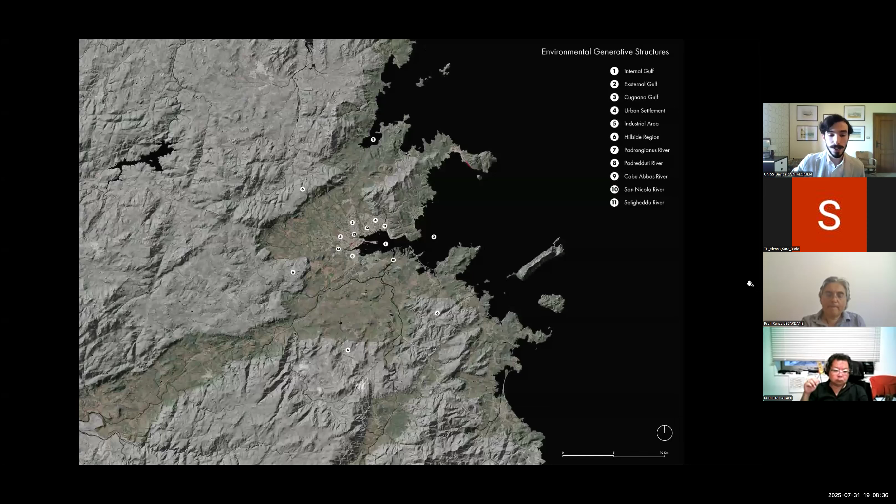We sincerely thank the professors for their insightful comments and constructive feedback from our last presentation. Their suggestions have deepened the clarity and rigor of our approach. Our central aim remains unchanged: to transform Olbia's structural vulnerabilities into concrete opportunities by integrating environmental elements with the city's rich historical heritage. This process is rooted in the principle of morphological sustainability, ensuring a coherent urban development strategy that respects both natural and cultural landscapes.

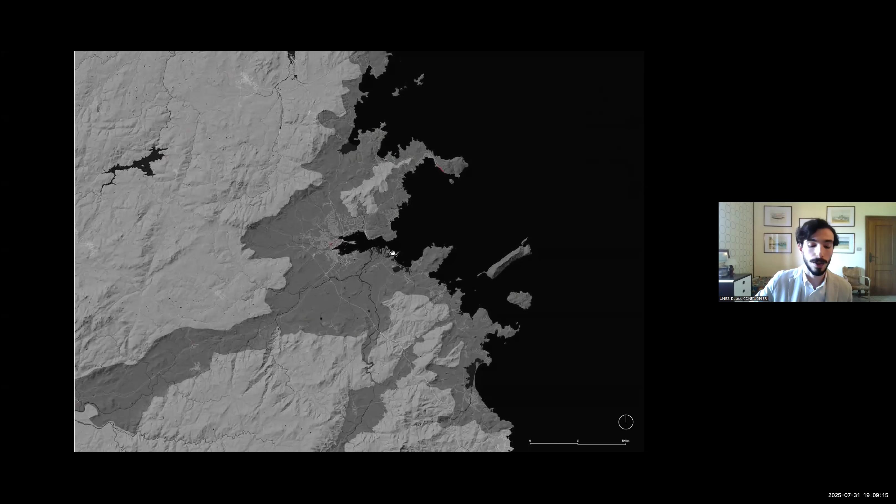As we have already seen, the territorial morphology has a decisive impact on Olbia's urban structure and spatial dynamics. The granitic hill arc to the north functions as a natural boundary, limiting expansion, while the complex Gulf system strongly shapes coastal development. Meanwhile, the network of watercourses flowing through both urban and peripheral areas governs hydrogeological processes that influence growth and potential development.

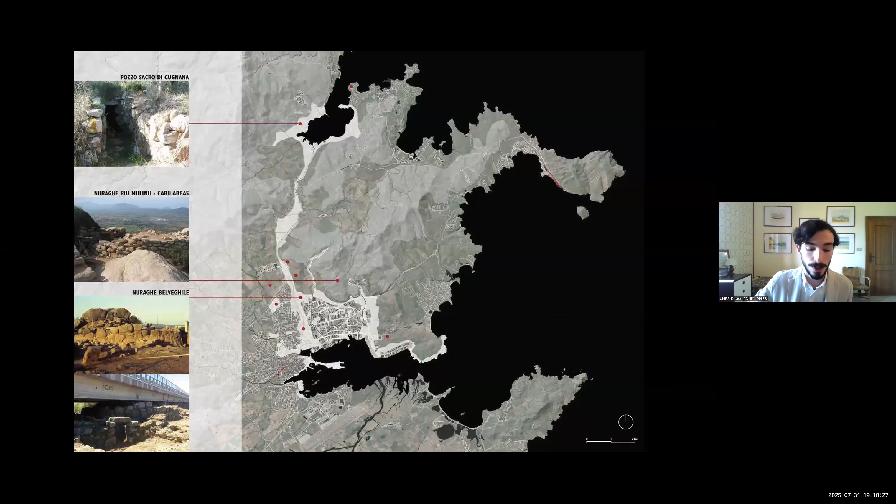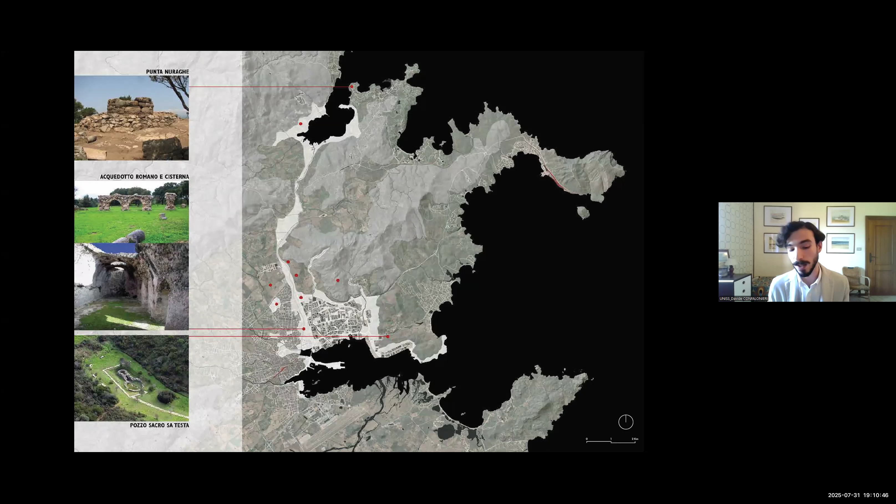Archaeological remains, including important Nuragic and Roman sites, provide a critical framework for ongoing dialogue between contemporary construction and the territory's historical layering. These preserved artifacts function as active urban elements, mediating the interface between new developments and ancient fabric through spatial relationships and material continuities that respect and enrich the cultural landscape.

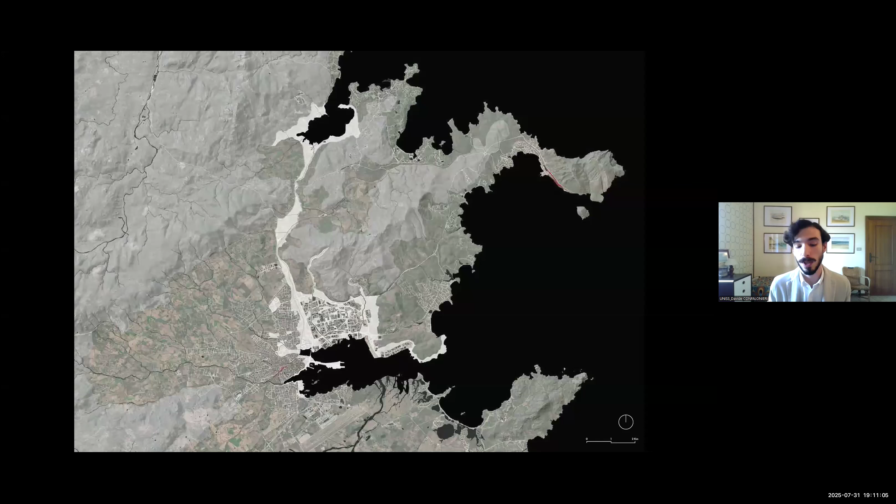Building on the professor's previous recommendations, the archaeological environmental pathway has been extended to include the adjacent area too, broadening the project's geographic and functional scope. This extension enables the creation of a continuous, coherent coastal system that reestablishes natural and cultural connections along the waterfront.

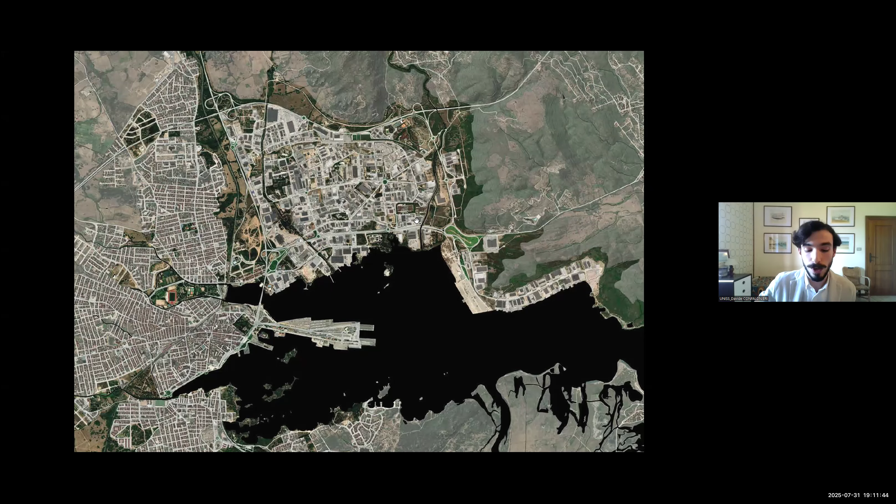By reconnecting fragmented zones, the intervention weaves a unified environmental fabric, transforming isolated elements into interconnected nodes within an integrated network of cultural heritage and ecological corridors.

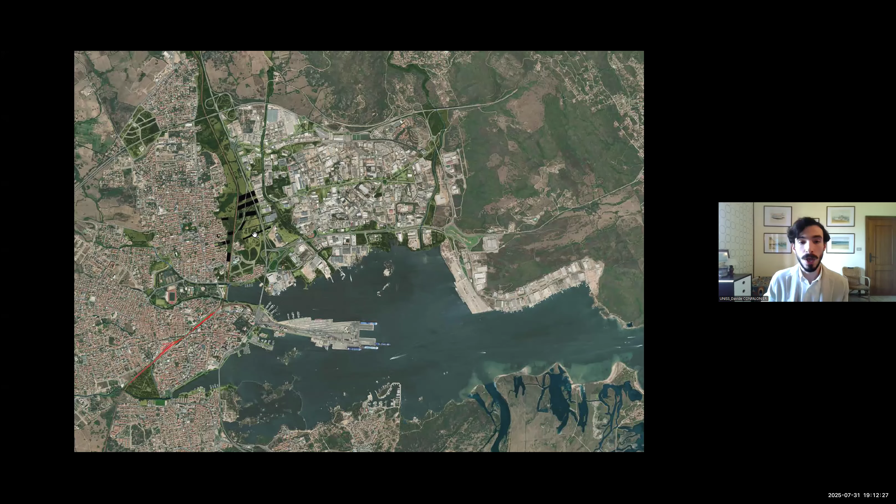Horizontally, a redesigned multifunctional waterfront works alongside transversal connections that integrate productive areas, residential neighborhoods, and the central park. While the focus here is on a specific area, the overall project extends across a wider territorial scale, encompassing a diverse interconnected system that progresses towards the Gulf of Cugnana, addressing both ecological and social needs.

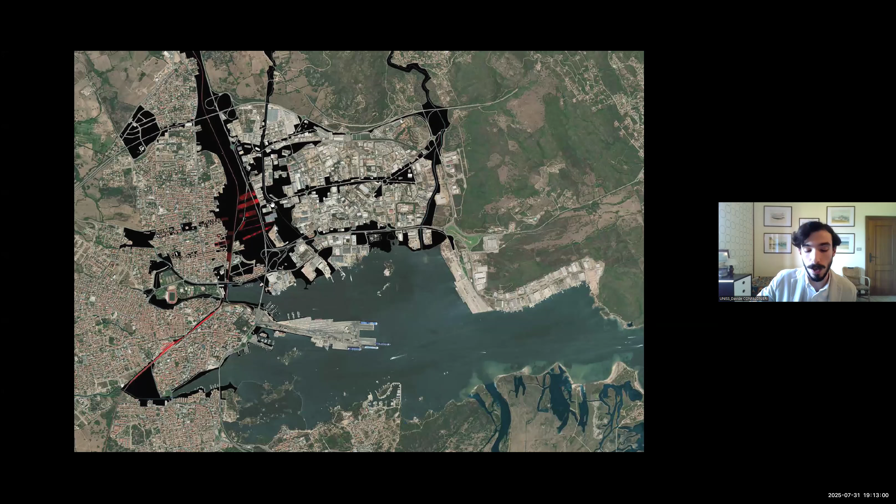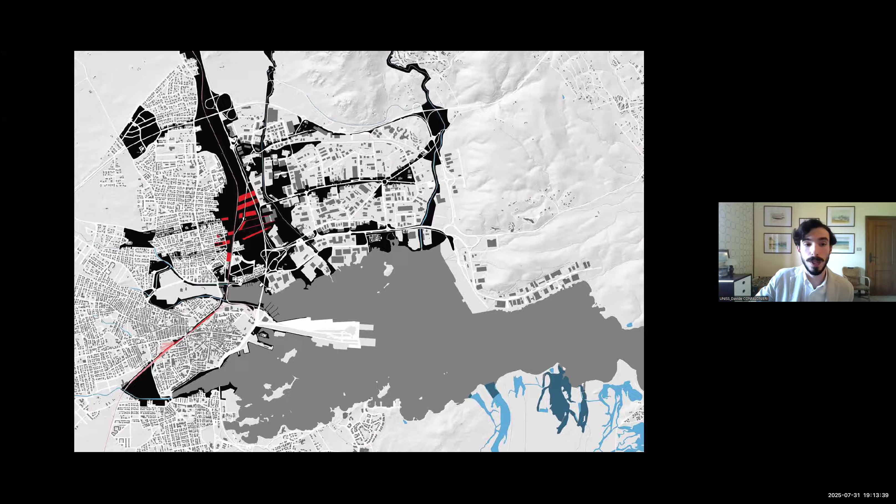The park serves as the core of the project. It is the starting point for waterfront development and the main access hub within the industrial complex. There are two complementary types of access: one from the park itself and another from the industrial zone, which currently has greater permeability. At present, access from the industrial area to the park is weak and needs strengthening, while the connection in the opposite direction is already effective.

On the other side, the park opens towards the compact city, and similarly, the city extends into the park. Our project focuses primarily on the terminal access points, identifying and reinforcing additional entrances along the route.